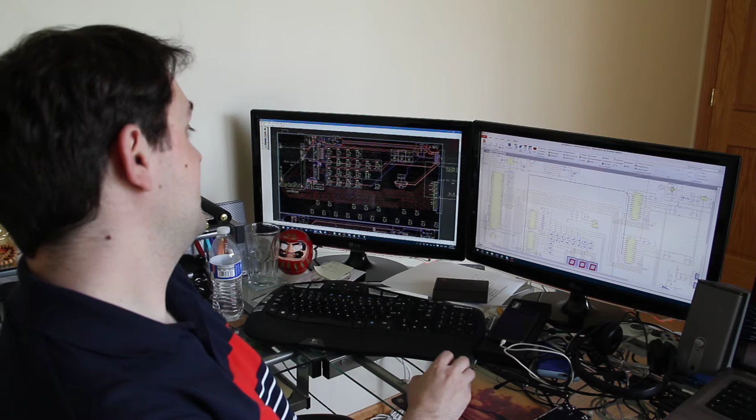It's not because I've been doing a lot of different stuff. It's because I've been doing one single thing, which has consumed a lot of my time. I'm talking about this thing over here - this is nothing less than the actual PCB rendering of how it's gonna look when we build the PCB.

I'm using a PCB editor which is very simple. It's a free editor called MBE, Minimal Board Editor, made by a Japanese guy, and it doesn't have a lot of features. I couldn't import the schematics into it to lay out components - I had to do everything by myself, but I learned a lot in the process, so it was quite fun, quite enlightening.

Now that I have this done, the next step is to send this board to a manufacturer and get the new components, start assembling, and make it look better, play better, feel better - everything.

One thing that's been going on in the meantime is I've been talking to Abel from Spain. He's a friend of Chewy and he's a 3D modeler. I've been talking about needing something to show how this thing could look, and being a 3D modeler, I thought he could give me some ideas and experiment with some stuff. He made this - I guess I closed it - 3D model.

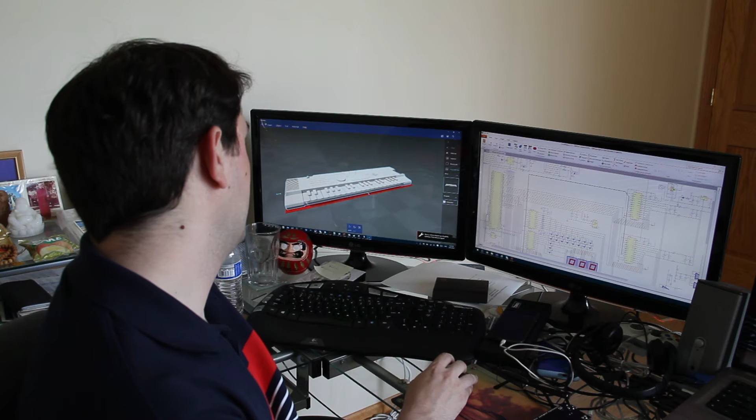This one is showing 3 octaves, just like the keyboard has it right now on my prototype. I know it's not very easy to see, so I'm gonna try to zoom in and manually focus. Bear with me. Let's see, this looks like it's somewhat in focus.

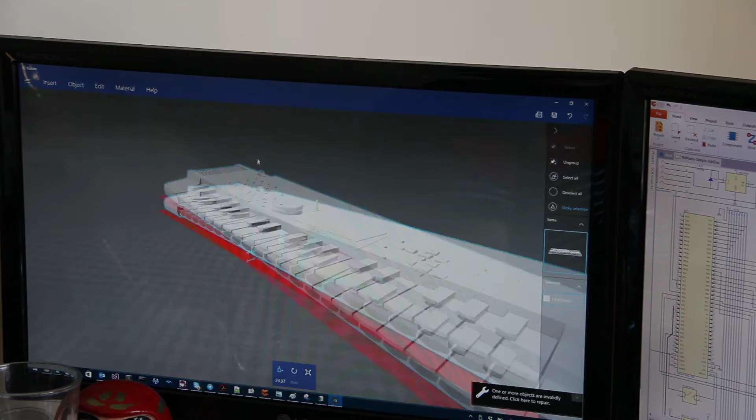So yeah, look at this. Can you imagine this looking like a real thing? It's quite exciting, at least to me. I don't know, maybe some contours might look familiar, maybe not - I'll let you decide that.

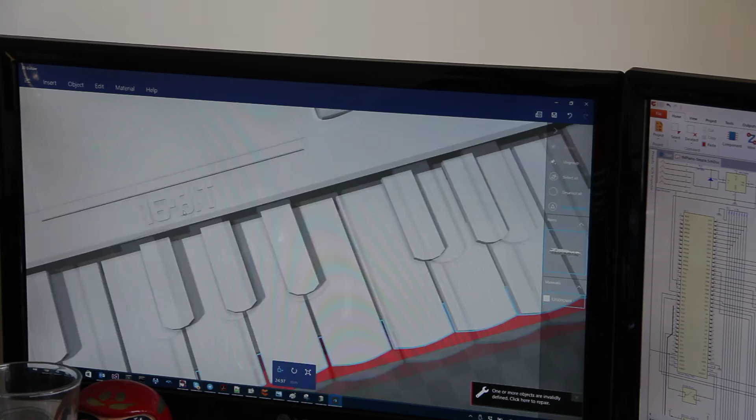It is just so nice to imagine that my thing can actually end up looking like an actual product. He kind of put down this 16-bit design here, like it looks like a Japanese Mega Drive, and I kind of really like that. Don't know if we're gonna go with this or not, but it's nice.

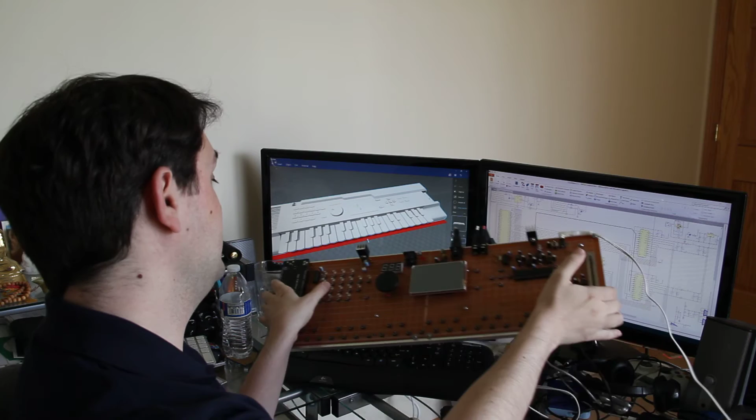So basically, this is following mostly what you see in my prototype. The layout is basically the same - the place where you see the keys, the fader and the rotary, the display. There's just a power switch that ended up here when I was doing the PCB, because it made more sense to be closer to where the MCU is.

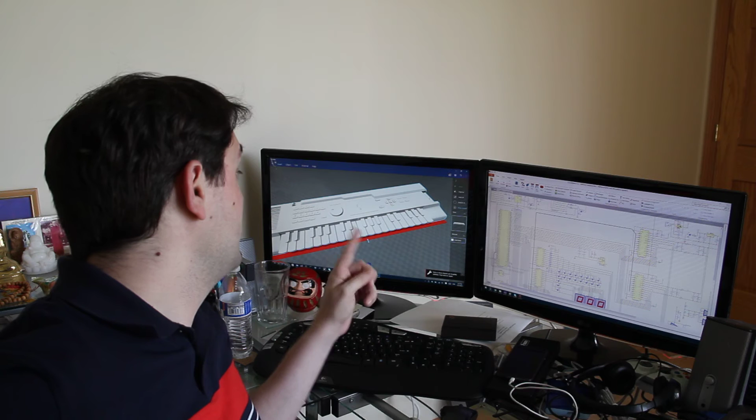Essentially it's been very cool. I'm considering making 3D prints of this to see how it's gonna look. I've looked, and this software, if you try to print it, lets you choose a 3D printing service. The printing service says there's an error in the model, and I can ask them to manually fix it or something, and it might take a few days to get a quote back, and I'll see.

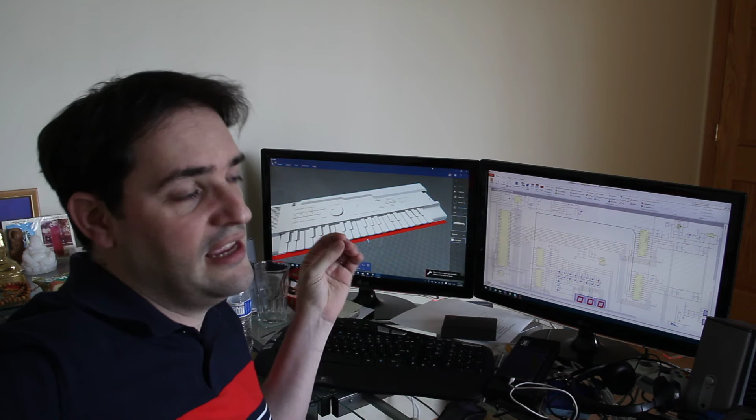Thinking about the amount of effort to adjust everything and send to print, and if there's a mistake - some hole a little to the left or right and things not matching - you have to adjust and print again, it might end up being cheaper to just buy the printer rather than sending it out for 3D print.

I don't know what I'm gonna do. My battery is running low, so if this video cuts short, that's why. I may end up buying the printer and trying myself. If I do, I'm gonna make videos to show the whole process step by step, and how it goes. But I'm pretty excited, and I think this could be a very nice product.

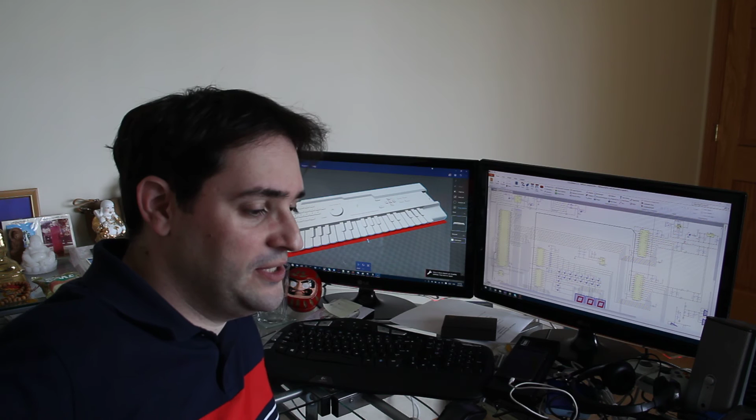I did a net list and calculated the cost. I'm having now somewhat of an idea how much it would cost to build - not prototyping like I did, but actually just buying the parts and soldering them in. So we'll see. I'm starting to rush because I see that battery thing flashing, so I'm gonna end the video here. But I'll come back when I have more news.

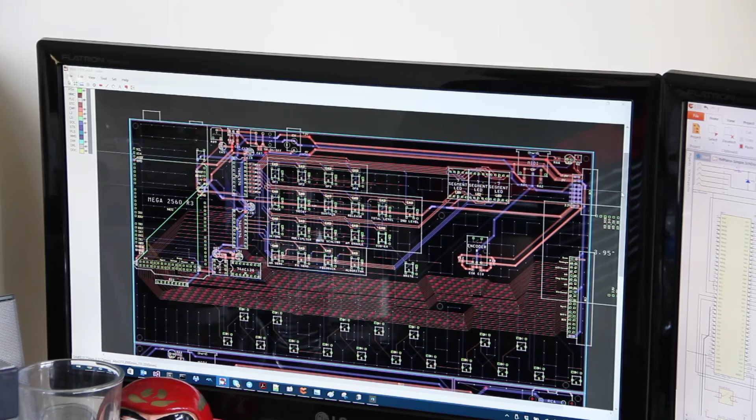I'm just pretty excited to see this, and to see the PCB getting done. It's pretty exciting, looking at all of this.